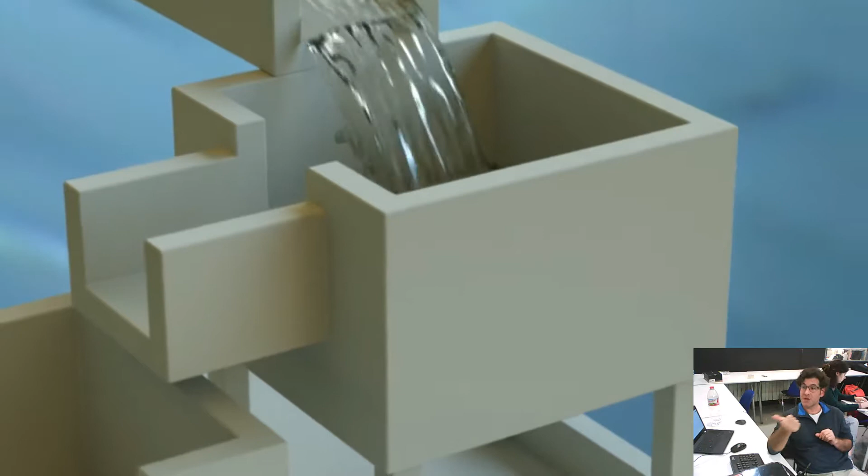When you want to do your presentation, and if you want to do a nice video of your product burning up, you can do it in Blender. There's also a big system around particles that can be used to simulate liquids and the behavior of liquids.

Yeah, the liquid system in Blender is very powerful. It's a little bit heavy, you need some time to calculate this stuff, but it's very, very nice. And also the rendering, everything is done in real time inside Blender, the calculations. Not always, depending on the kind of materials, but this kind of render you can get on a good GPU in real time.

How does it compare to After Effects? Because I recently did a similar animation with particles in After Effects. Okay, After Effects, as a design, is a 2D compositor. So it's like a Photoshop on time, let's say. You can composite images on layers and move them or animate them around over time.

Yes, so you can do that in Blender too. I will show you later how, in a node-based system. It's more similar to Nuke. Maybe if you're in that world, Nuke is one of the most powerful compositors for 2D video. After Effects is more spread because Adobe is a big company, but it's not the best in that kind of work. You can also do that in Blender.

But that's different from this, because here you're calculating a 3D mesh that's built of liquid. It's not just the image that you build. You have a real object with geometry, so you can 3D print your water later if you want. It's not just the view. In After Effects, you normally do 2D particles that simulate stuff so you can show them in a movie or whatever. Here you really build the object.

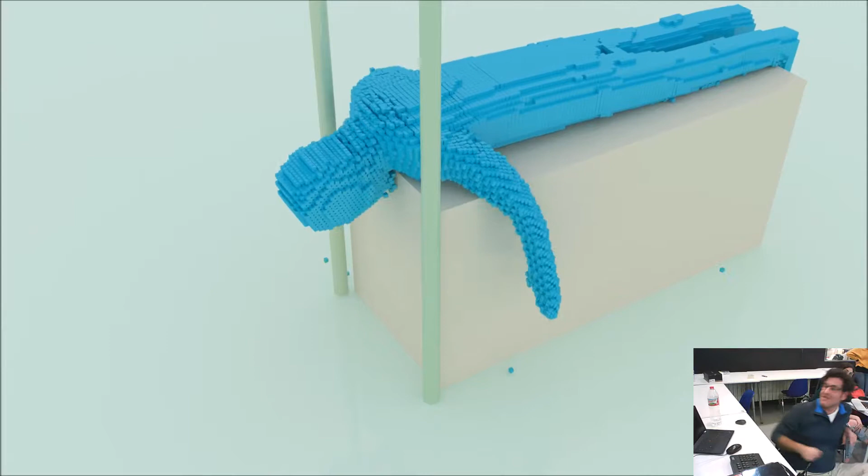And you can give the material different elastic properties, rigidity, stiffness, etc. This is nice sometimes to do a modeling that's not so hard, because you can use some variables that will give you some randomness, some style in your work... yeah, this is a little bit sadistic, but...

I haven't seen this video before, sorry. I think he was testing the model.

Okay, well after all that VFX and modeling techniques I already explained, there's also a technique called sculpting. It's very similar to sculpting clay with your hands. Maybe you know a software called ZBrush. Almost anyone has seen that kind of software where you can push and pull clay to build something.

Blender has a really powerful sculpting module where you can build 3D models in a more intuitive way, without exact measurements of the part, but this is very useful. I teach it normally linked to 3D scanning, because when you 3D scan a person, for example, you end up with a cloud of points, and with these tools you can fix that cloud point and work with it very easily to get good results.

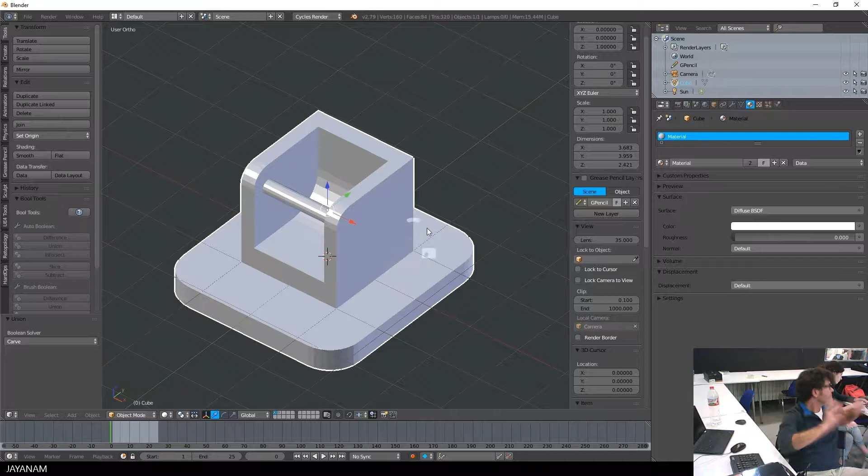The Boolean tool in Blender has become very powerful, so now it's very easy to do this kind of thing based on primitive objects.

You didn't have OpenSCAD as a class yet, right? We talked about it. We covered many softwares last week. Okay, you talked about it a lot.

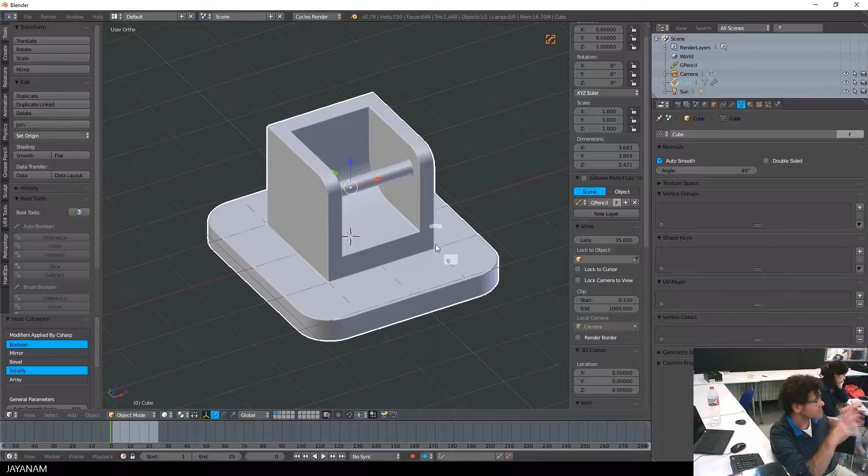Because that, from my point of view, is one of the best approaches if you're really into parametric modeling. If you want to build a hinge, for example, that can be configured for any door, you just write a program, not model a hinge, and that program will build a hinge for you.

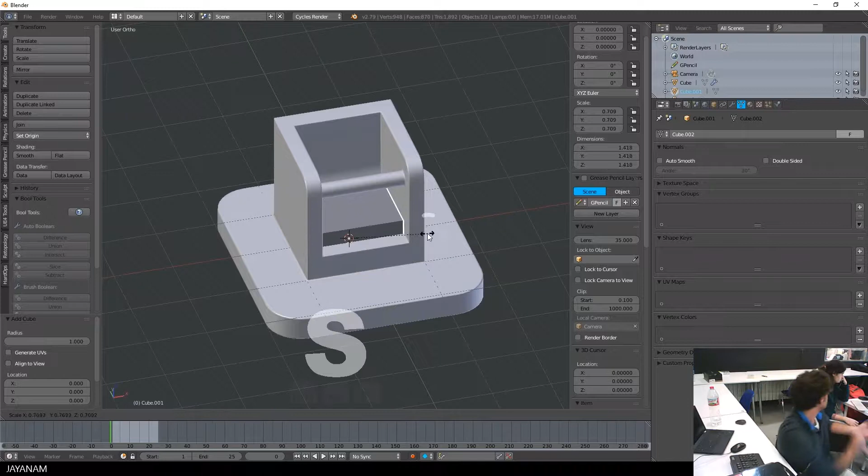So you can also do this inside Blender in Python. You can write a script that builds doors, and you just define the different features you want and combine them to get results. Obviously that's a lot of work if you just want one door, but if you're running a factory that makes any kind of customized chair, you can build a script that defines a chair in a more conceptual way.

And you just say this height, this wide, these several variables, and that will build a chair. Okay? What was that program you said?

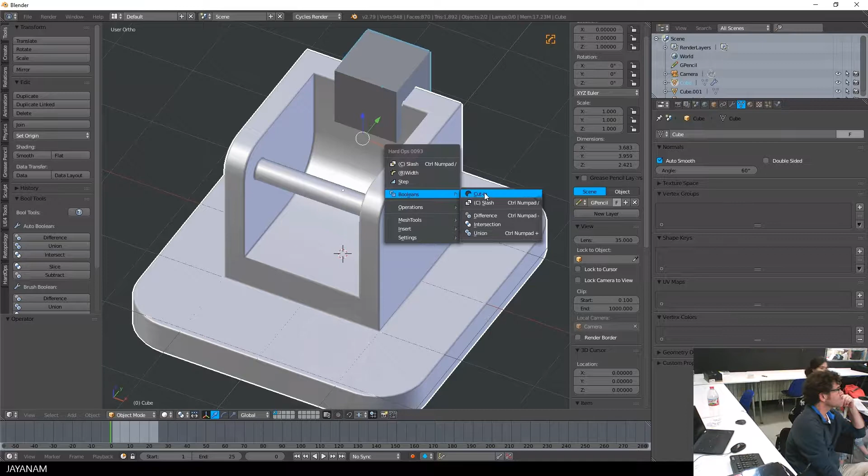Well, there are several programs to do that, but OpenSCAD is one of them. I always talk about free software. If you want proprietary software, you need another teacher, and there are plenty who will teach you other kinds of software. My solutions will always be free, and not always the easiest to learn, but in my point of view, free tools offer a lot of advantages against proprietary ones, not always in the interface or how to learn them. But OpenSCAD is very famous, a lot of people use it.

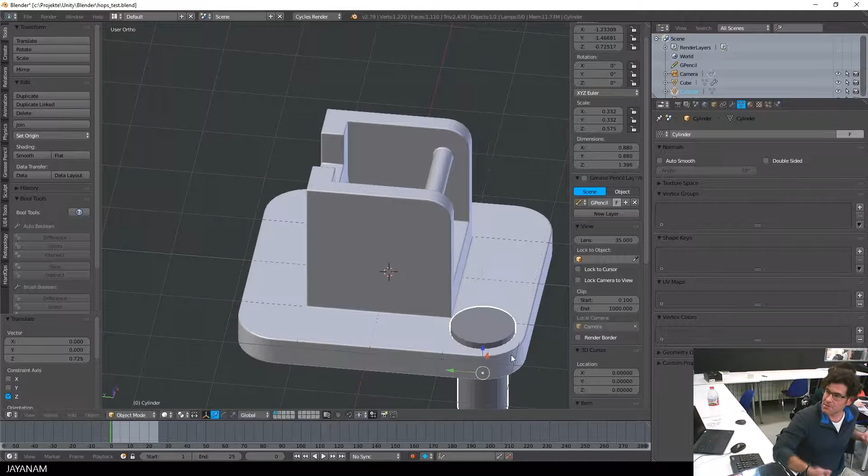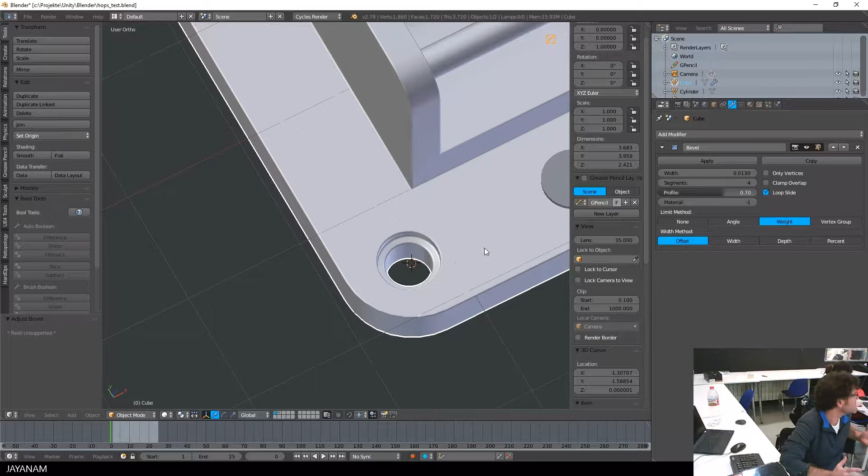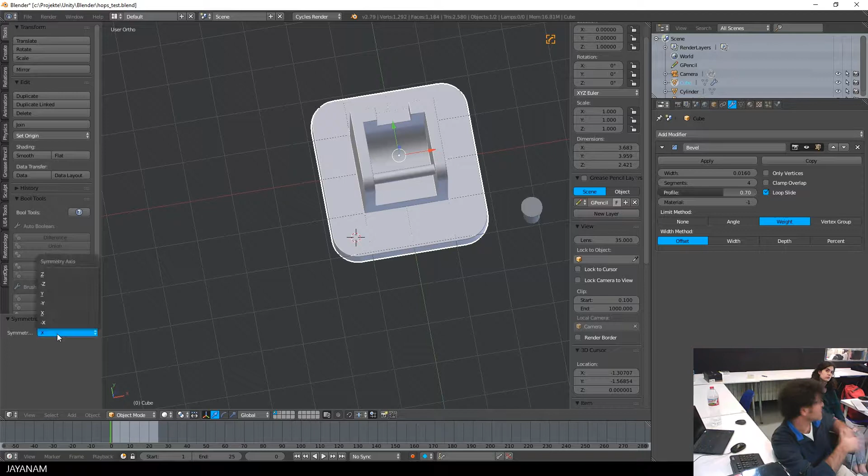For example, you know MakerBot, the company that makes 3D printers. They started as a fully open source printer company using open source software. So they built a solution using OpenSCAD inside Thingiverse, you know it? It's a web page where you can download models built by other people, or post your own models for 3D printing. They built a solution based on OpenSCAD to customize models inside Thingiverse. So for that kind of stuff, having parametric software is very good. And when it's open source, you can do that. When it's closed source, you cannot do that unless you pay a lot of money to Autodesk or whichever.

Okay. So, let me breathe a little bit. Okay.

So we're going to switch to Blender. As I said before, Blender is an interface that has evolved over a long time, but its origins are designed mostly for being efficient. So maybe some of the user interface parts will be a little bit strange at the beginning, but once you get used to it, they are very, very fast for working.

For everyone to do basic 3D modeling. I'm going to explain more or less the parts. As I said before, Blender is based on windows. So as you can see, this is a timeline, okay? This is the time, and I can move along it. But my timeline is also a window that I can make bigger or smaller. And my 3D view is also a window that I can move from one point to another. And my buttons are also a window. And here I have an outliner, which is a list of objects with properties, that's also a window.

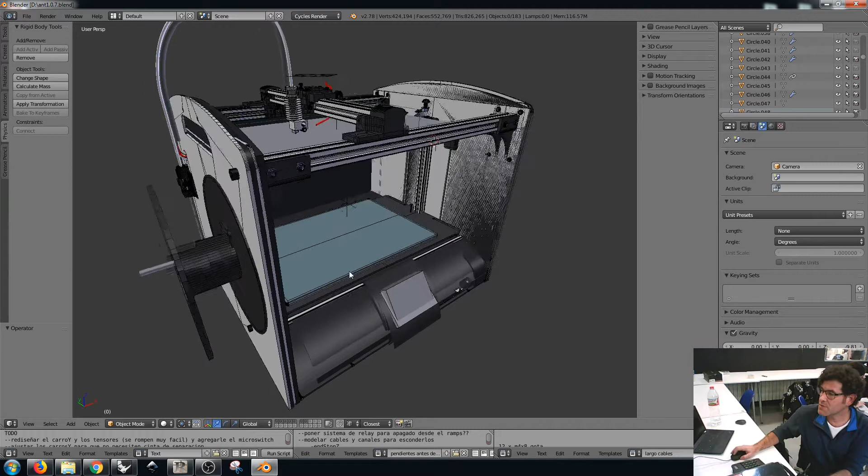This is a 3D printer. Blender has a layer system that's very cool for doing things like this, because you can put objects in different layers, like any package, but you can flow between layers very easily. You can just turn on and off the different layers very easily.

So you can put your aluminum off-the-shelf parts in one layer, so I just have to define the dimensions. Then the parts of the printer that are 3D printed and custom modeled are on the next layer. Then for doing the holes and stuff in all these parts, I have to do some booleans so I can move the holes. So in the layer next to it, I have all the parts that are built inside that part.

That kind of tools are very powerful in terms of efficiency. They are fast.

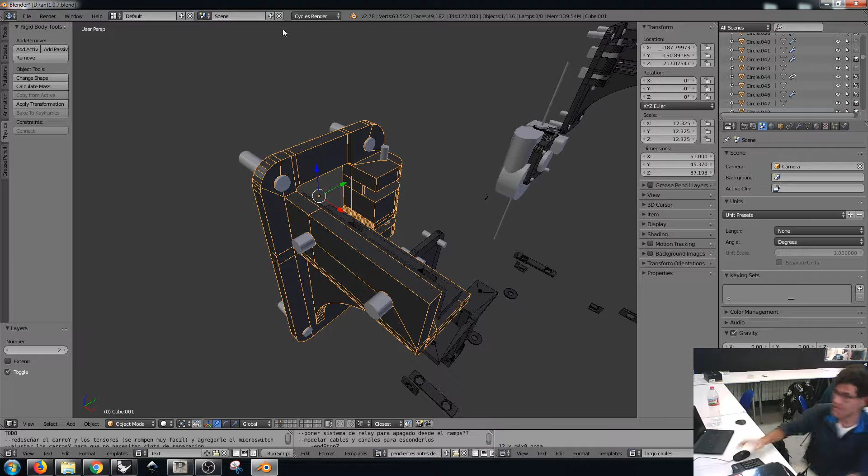Here I have the mechanical part of the ropes that move all the printer, and it's also cool that I have here all my notes, my to-do list, the bill of parts list of the printer, all my calculations and stuff. I start doing my text files with everything in it.

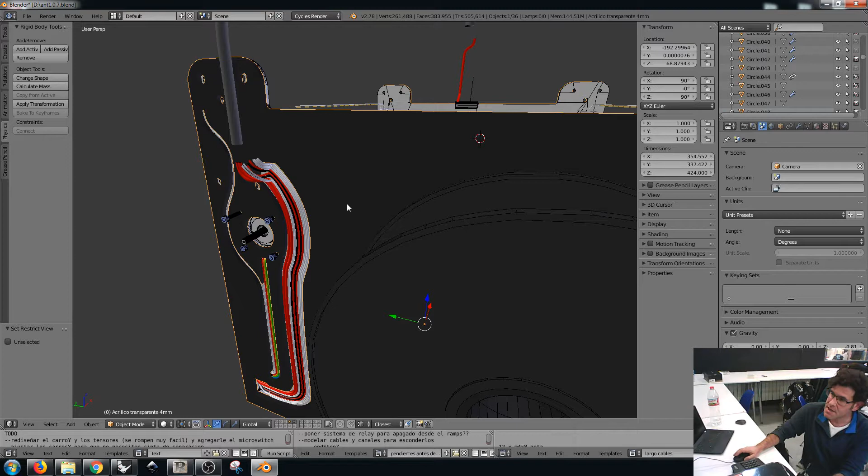What else? Well, these are the acrylic milled parts. This is the electronics - you have the motors, the cables, the electronics stuff, etc. in one layer, and you can turn off and on the other layers to see how that fits in. For example, these cables go inside this part - so if you see this part, you see the cut where the cables go, and when you see the other layer on top of it, you can see it all.

What else? Well, of course, you can do very nice renders of your work.

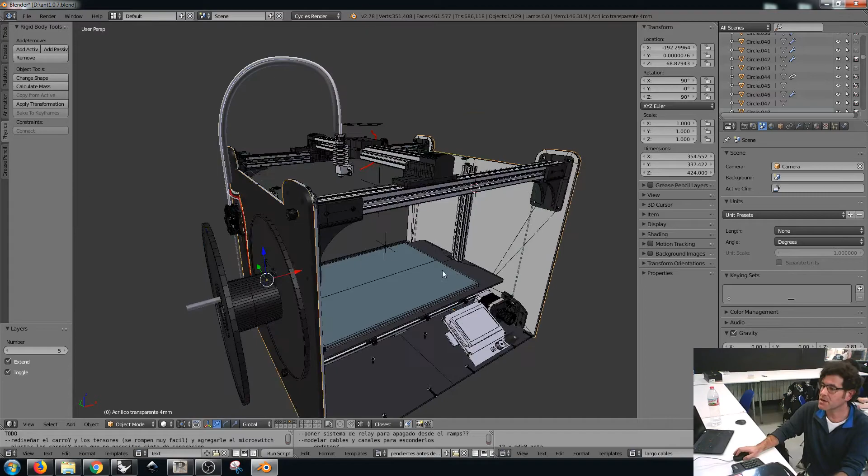One other thing is the rigging I was talking about before. These arrows here that I selected now are a rig for the printer. This printer is based on a system called Core XY, where you have to move two motors to move the X and Y axis - when you move them in the same direction, you move X, and when you move them against each other, you move Y.

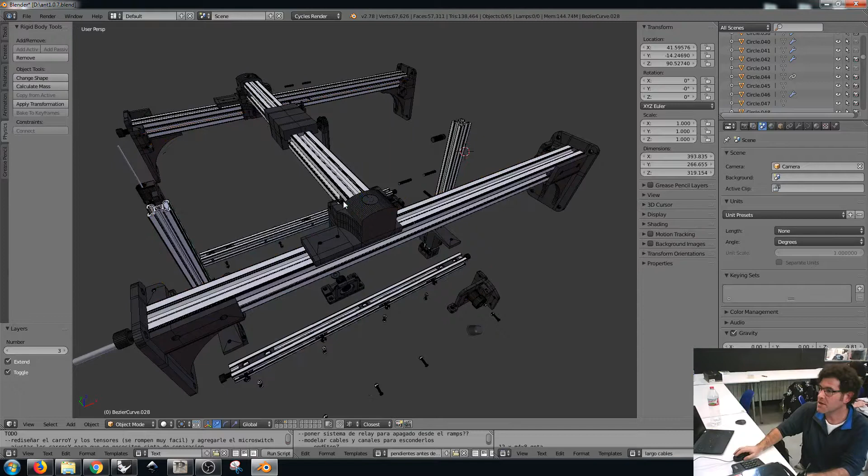That's built with this strange path of a rope, but the cool thing is you can put all that inside your design in Blender, and rig it. So if I move the X-axis, all the parts linked to the X-axis part will move together. In fact, even the flexible parts bend themselves, so you can see how the printer will behave if you move it in one axis or the other.

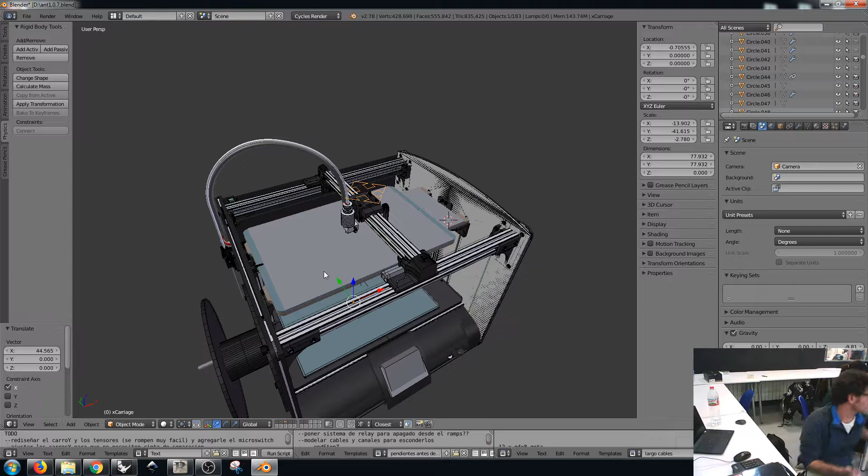All of that is built with a rigging system designed to build characters for a movie, but those are the same principles - you want to link different parts, you want to constrain the movement to one direction, to one axis, etc.

Question about background in industrial design and how accurate the program is. It's very accurate, I use it a lot for CNC and 3D prints. In the next Blender class we'll do something more practical, and I'll show you that you can use Blender only with text input. You can say move this object exactly 1.001 to the right, you can snap things. In fact, in my opinion, it doesn't lack anything that you have in AutoCAD or any CAD program. But that's a long discussion, and if you have engineers in front of you, it's complicated. So normally I say Blender is not designed for that, but in my opinion you can do exactly the same, and more, if you think of it less as an engineer and more in an open way. That's maybe what we're trying to teach in Fab Academy. It's the same as saying you cannot do circuit design in Inkscape — you can do it without a problem, it's just a matter of scale. Since units are an abstract concept, you can use a kilometer or a millimeter, so your resolution is endless. Maybe if you're an engineer at Nissan you cannot design motors with the same accuracy as in Catia, but if you're building digital fabrication stuff like what you're going to build here, it's more than enough.